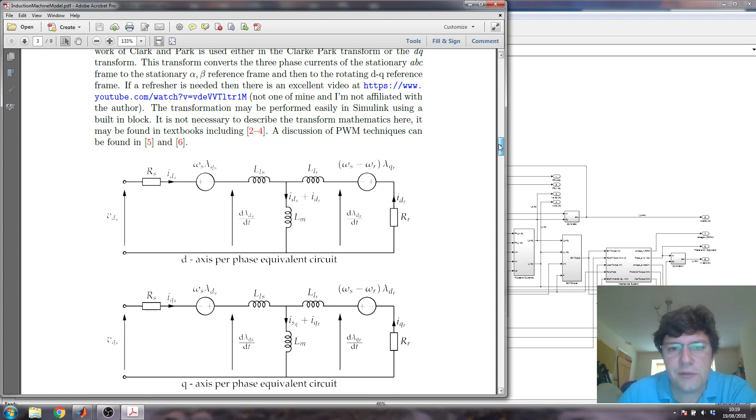Alrighty, so we have our Simulink induction machine model, and this video relates to the Simulink induction machine write-up, which I have on my website. I won't go through it, but effectively the video is there to get from the defining equations, which are derived at some length, into how you actually put it all together in Simulink.

So I've got the model here. There is a model in Simulink of an induction machine, and you can use that, no problem. It may be the case that you want to derive it so you know how it works, or it may be the case that your professor has told you that you will derive it, and that's that, because they want you to know certain things about it, or they want to be certain that you understand it.

It may be the case that you want to extend it somehow in a way that the built-in model isn't easily amenable to. Or it might just be to demonstrate a certain setup that you want to have of your own, rather than having to rely on certain Simulink packages or model toolboxes.

So we can start at the left hand side, and we've got some connections for the phases, and we have each phase, we could call them,

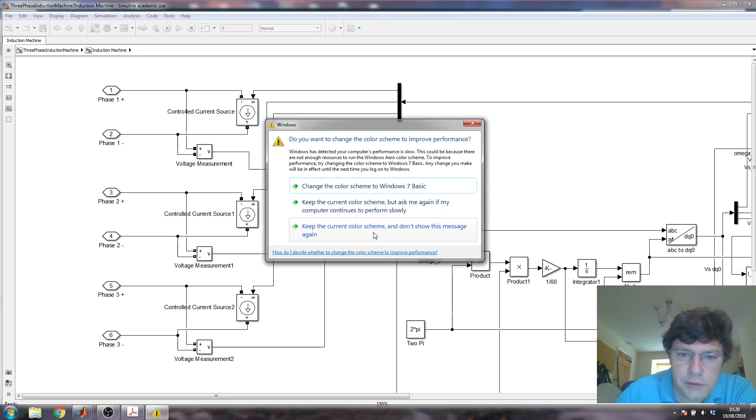Go away, wretched creature. It says don't show this message again, but I'm pretty sure there are other videos of me where it pops up and says don't show it again, and I click it and it duly puts it into the next video.

So there is no neutral point here, we've got open windings. It's the business of the person who is modelling the machine with the power electronics and whatever else is used to decide how that machine's wired up. They need to be able to wire it in star or delta, with or without a fourth wire, a neutral wire. So we will just call it plus or minus, but you could say dot and non-dot if you prefer, because secretly we know there's an inductance with a series resistance.

So if you're reading the text, you'll know that my preference is to model the entire system as a controlled current source, in order that we don't end up with a singular matrix in our simulation due to the connection of voltage sources. And this is certainly true if you're using a voltage source inverter.

If we ended up impressing a voltage across these terminals, and this was a voltage proportional to effectively the back EMF, and there were no resistances as well, we'd end up in a situation where two voltage sources have been connected together, and Simulink will either insert a little resistance for us, which is not really desirable because we need to be in control of what Simulink's getting up to, or it will throw us an error, which is more desirable than inserting a little resistor, but it's still not very desirable because it is traditional for simulations to run properly.

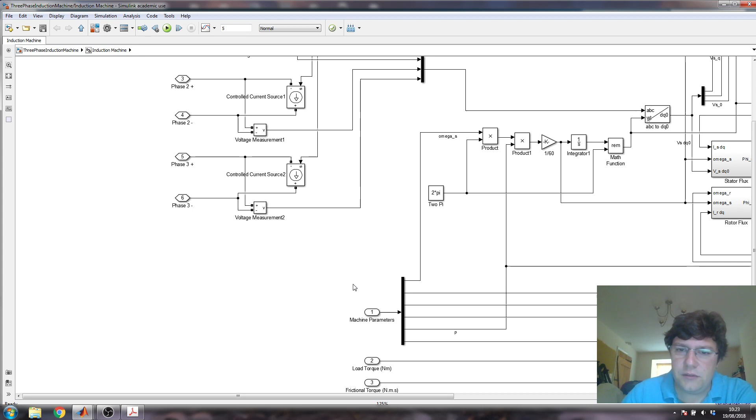So if we zoom out a little bit, we've got a set of machine parameters that we're going to put in, and these will be the machine parameters which are given in the documentation. So we've got the synchronous speed in radians per second, the mutual inductance, the rotor leakage inductance, the stator leakage inductance, number of pole pairs, and the mechanical inertia of the rotor and whatever the rotor is connected to. Other things we have are the load torque and the frictional torque.

So this is if you were connecting this machine to, say, a gearbox, and you know that connected to the other end of the gearbox there's some other things you need to drive, like a fan load, you might try to model the torque which is produced by the aerodynamic effects of the fan load. It might be proportional to the speed squared or the speed cubed, and you have some load torque value that is derived from that, and you know the speed because you have the rotor speed.

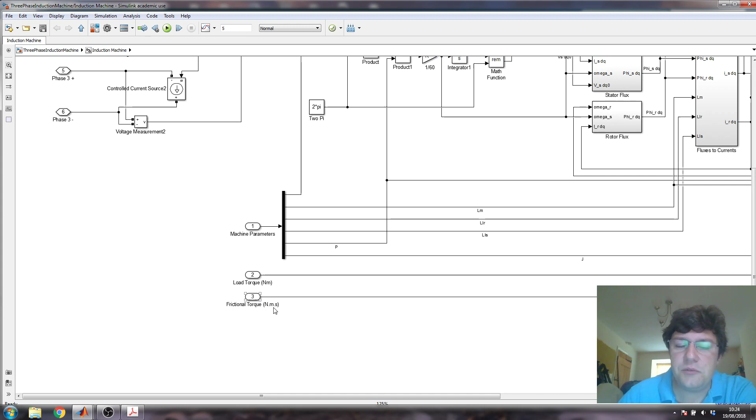What is more, there will be some bearings in this gearbox, for example, and they will have some frictional drag, and of course there will be friction for the fan and everything else, so maybe we have some frictional torque as well. And in the write-up, that's called D. I don't know if it's called D in the diagram.

I haven't labelled it. Very naughty. I could label it D if I wanted to. The way you do the labelling is you just double click the wire. That would be how you did it. I could call that TL as well. I did it somewhere else. Good. That's alright then.

So there's a fair bit of, sorry, I should zoom out up here, down there. That's it. It's so far away. So these are our voltages which are impressed on the machine windings, and we've got our ABC to DQ. So this deals with the Clarke-Park for us. It's a built-in Simulink block. I can't really look inside it because Simulink doesn't allow that sort of thing. But I've set up this, the standard. You can choose another as well. It really doesn't matter too much which you choose. I will leave it as this one. All it means is there'll be phase shifts in your answers.

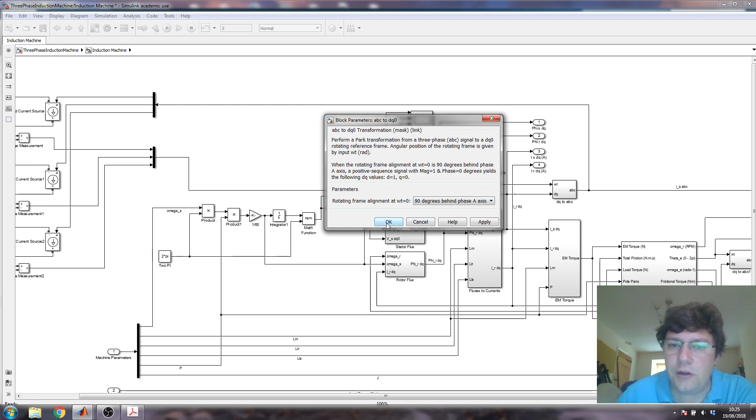So we've got our DQ, and we are going to apply this to the calculation of the fluxes. So we calculate the fluxes first, then we do our calculation of the currents from the fluxes, then we do our calculation of the torque, electromechanical torque, then we do our calculations of the mechanical system. This gives us the torque on the shaft, the speed of the shaft, and so on, and these parameters are fed back variously from there, and there.

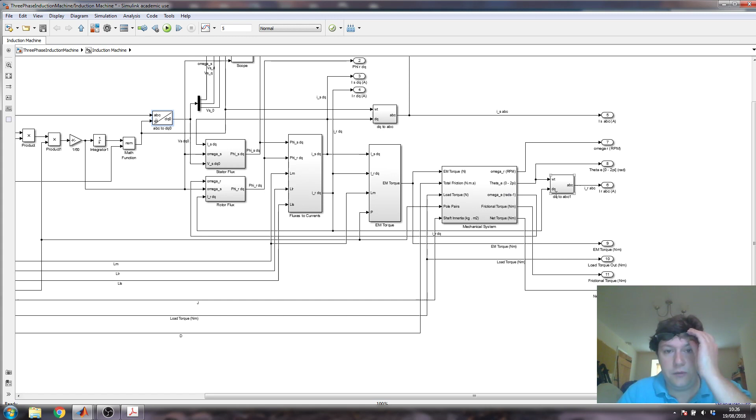Having DQ to ABC then goes back to give us our currents that we are drawing out of the supply. In fact, it's this block here, so these are the stator referred DQ currents, DQ to ABC with the omega of the rotor, and then they are injected back into the, is it the rotor? Pardon me, it might not be. Let's have a quick look. Omega S, the stator is this, which makes a lot more sense. So we have the stator currents in ABC reference frame, and they are what's fed back to effectively the windings that we are connecting up as the stator. So we do a little bit of calculation here, which I'll come back to in a bit.

So if I was to go into the stator flux block, I've got the synchronous speed, the stator voltage in DQ, and the stator current in DQ, which is fed back from this calculation. So not only are the fluxes calculated with respect to each other, for example if I look at this wire here, sorry, not that wire, one of these wires, there are elements inside this block. Oh, here we go. So the stator flux is calculated based on the stator DQ current because of this feedback here, and the rotor flux is calculated partly based on the rotor current. But to calculate the rotor current we must first solve for the flux, because of this wire here in the case of the rotor, and this wire here in the case of the stator. So Simulink has to solve all of these equations simultaneously.

So if we go into the stator flux, try to get it where the camera cannot block any of it. There we go. When I say the camera, I mean the picture of me, which is down here. So we have our synchronous speed in rads per second. Probably should have put some units on there, but never mind. The stator voltage in DQ and the stator current in DQ. Now I've cheated a bit here and I've put some constant blocks in. Ideally, if you've got a much larger simulation where this motor or generator is a part of something else, it would be preferable, instead of hard coding this stuff, to load it up from the workspace when you start the simulation.

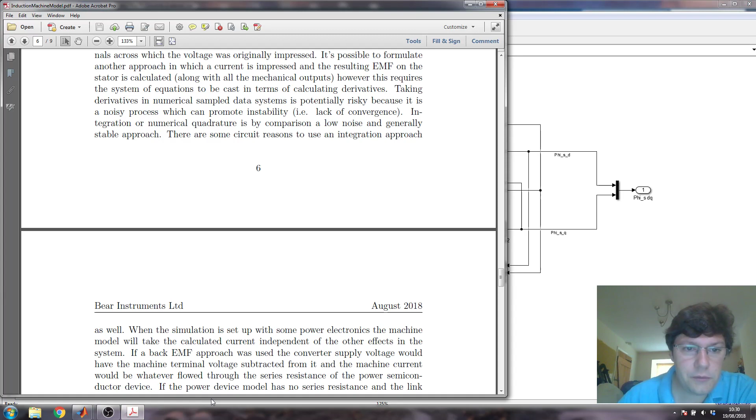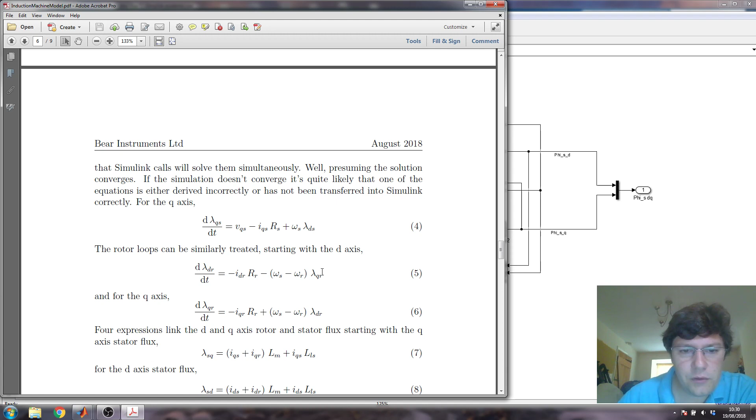What I'm doing here is I'm developing the d flux by dt for the stator. So if we went back to the document and I scroll up to the appropriate spot, this is the d flux by dt follows this expression here. Is that the one I'm after? Yes, it is. Effectively, it's these set here, for the rotor and the stator. These are just the stator, of course. The rotor's in a separate sub-diagram. So this is the stator d-axis, this is the stator q-axis, and this is the expression I'm developing.

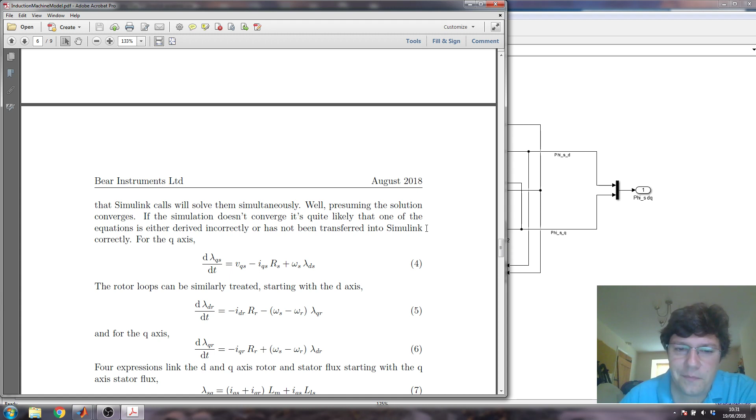VSQ minus ISQRS plus, I call it phi. I know it's lambda in this document, but I wrote it in my lab book as phi, and I'll have to change it to phi later. So when you download this, it'll probably have phi there, but there we go. Phi SD omega S, and you'll integrate that, and of course you have to take something back from here and feed it back, which is the Phi SD omega S, because it's multiplying it.

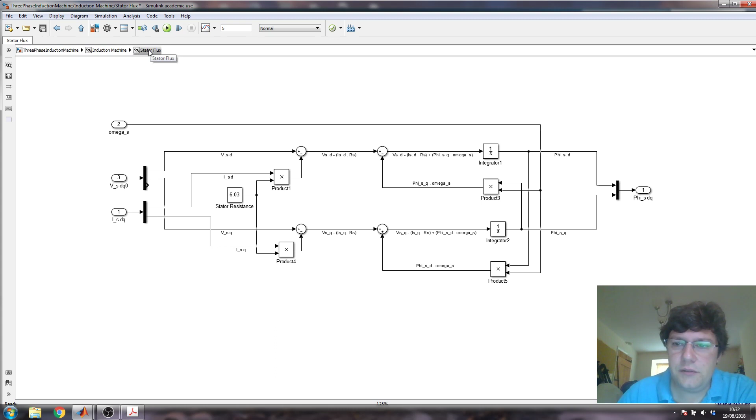Oh, it's added to, so subtracted from the VSD ISDRS, and that yields this bit. Then we integrate, and that gives us the Phi SD. So this lot is the text form of one of these. It's a very good idea to label up your wires like this. So that's how we derive the flux, or not derive, produce the Phi SDQ.

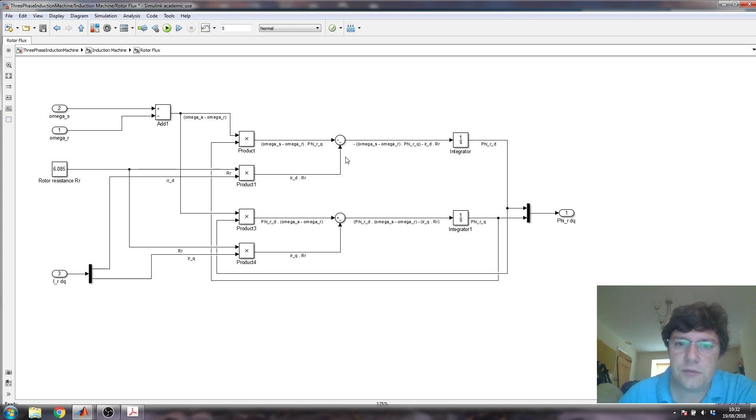Going back in, I've got the rotor flux as well, exactly the same setup. I've hardwired the rotor resistance when I could, of course, have taken it off the workspace. And I have the same arrangement, slightly different equations, same method. We develop the differential equation, then we integrate. Nothing unusual there.

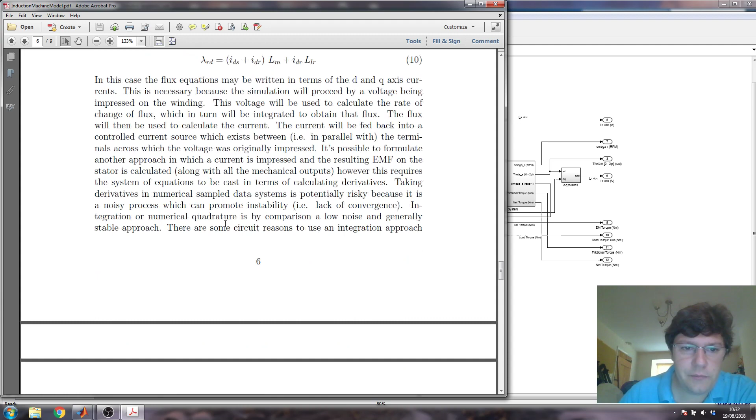Then we want to get from flux to current, so we have the four flux equations. They're derived from these four, 7 through 10, but I write two of them out further down in the form that I actually implement them. I didn't bother to write out the other two because it's not difficult to see from 11 and 12 that you'll end up with an IQR and an IDR that have some fluxes and some currents and inductances on the top, and they'll have some LM plus LLR on the bottom, or denominator.

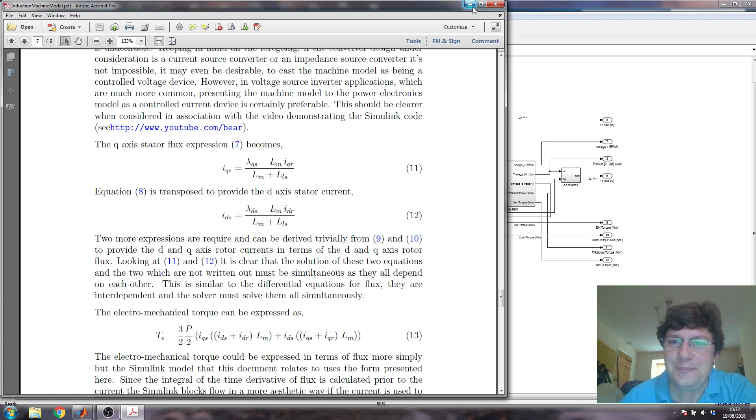So we will have a look at the current block. So inside here I've got 4 blocks, each for one of the currents. I take in the two sets of fluxes, and I've got some parameters that I took from way back. So if I go back here, I've got some

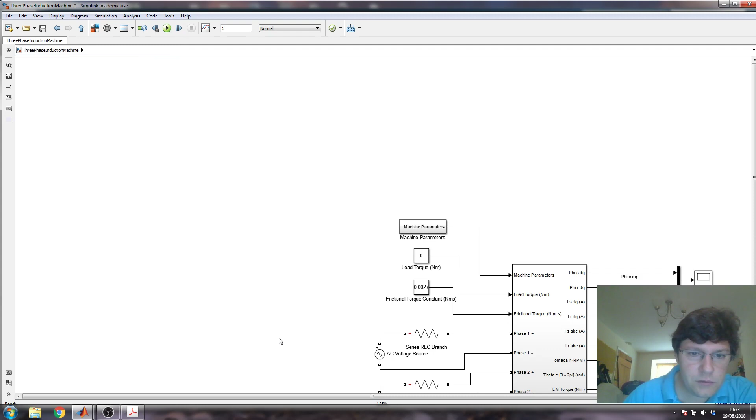One of the things I've never liked about Simulink is the way it likes to zoom in on things.

This is where I started the video. I've got some machine parameters here, and I'm feeding those up into the fluxes to currents subdiagram and they appear here. You could draw these from the workspace as well, in which case you don't need to pass them around in wires, and that would be a very sensible thing to do.

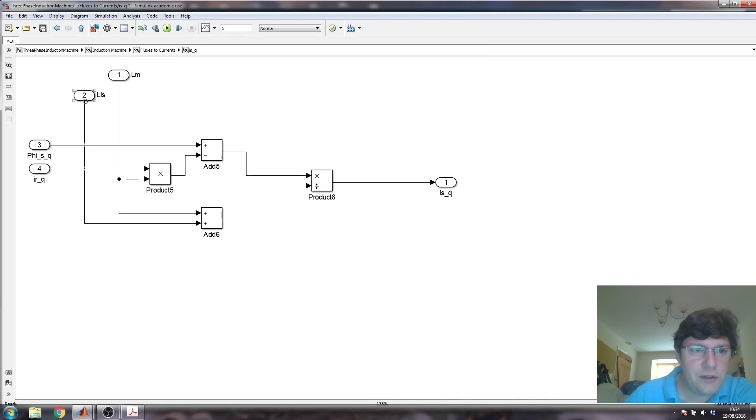So if I just look at one, we'll do one that's actually in the sheet, the stator Q axis. There really isn't very much to it. I didn't even bother to label it, which is perhaps a little naughty. But all this does is implement, which was it, Q or D? Q. It implements that expression there, flux minus Lm IRQ all over Lm plus LLS. This is Lm plus LLS added, and then dividing this bit here.

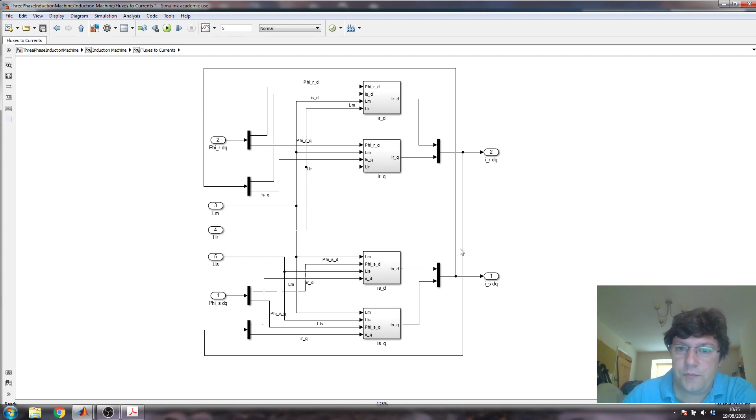Reasonably trivial stuff. So there's 4 lots of that, and they produce the IRDQ and the ISDQ. And you will note that there is feedback from IRDQ to calculate ISD and ISQ, and there is feedback from ISDQ to do the calculation of IRD and IRQ. So once again, Simulink has to solve this lot simultaneously.

So once we've got some currents, we can do some torque calculations. So this equation is a little bit longer here, so I've decided that it's in my best interest to write them out properly. If you don't write out the equations, what you'll probably find is it doesn't work, and then you have to sit down and figure out why. It's the same with how neatly you draw out the diagrams. If you don't draw them out neatly, it just makes it a rat's nest, and then you have a hell of a time figuring out what's going on.

So we've got our ISD, our IRD, our ISQ and IRQ, and they're just unmultiplexed. And we are effectively working our way towards 3/2 times the number of pole pairs times some currents times some inductances. Actually, these are just fluxes, but if you go back here, I didn't like the idea that I have to put fluxes straight in here from here and go round the side. Since I have the current here and the general flow of the diagram is left to right, I would prefer to take the currents in and do a little bit more calculating.

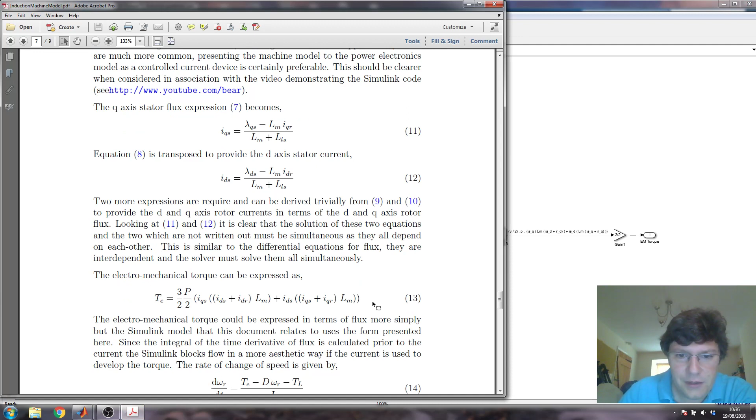You can of course see things differently and put this block down here maybe and couple that straight to this. That would be alright as well. Anything that works is fine as long as you can explain it. So I wouldn't bother to, I mean, this equation is this equation here, it's 13. It's just written out uglier. We're just adding up and multiplying and doing the things we need to do.

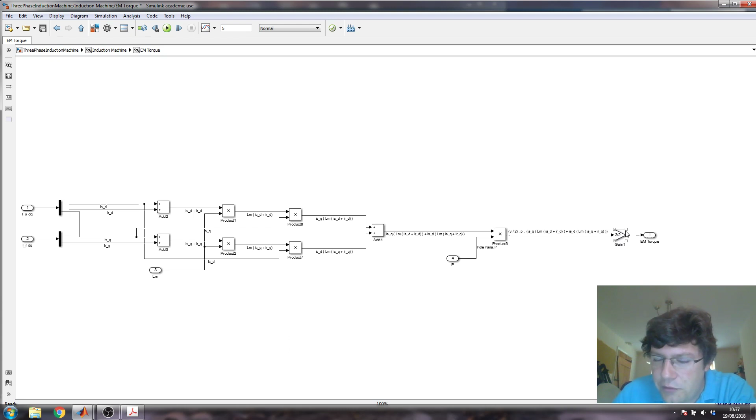There's a slight mistake here. If you look, there's no 3/2 in this wire. The 3/2 is actually on this wire because here's my 3/2 gain block. But never mind, it's just a minor thing. And we get out the torque. Then we will do some calculations of the mechanical system.

So we take the electromagnetic torque in, we take in the frictional torque which is supplied, is the D, we take in the load torque which is supplied, is the T sub L, number of pole pairs, and the inertia which is J, and out of it we're producing, well, the frictional torque is only the frictional torque we took in, but I like to have it as an output because sometimes I want to look at how much friction I've got on in the mechanical system. Essentially it's a way of working out how much useful work I'm getting out of the machine or out of the system the machine is connected to.

We also have the rotor speed. I like that in RPM because I like to think in RPM. I don't like to think in radians too much. If I'm dealing with machines, then we think about mechanical degrees and electrical degrees, and I might have to think about radians a bit, but I would prefer to compute everything into RPM. Then I've got my electrical position effectively, which is 0 to 2 pi, and that will loop back. So you'll get a sawtooth waveform as the machine rotates continuously. I get my electrical speed, which is in rads because that's the common method, and I'll end up with the net torque. And if of course the net torque is positive, the speed of the system will be going up.

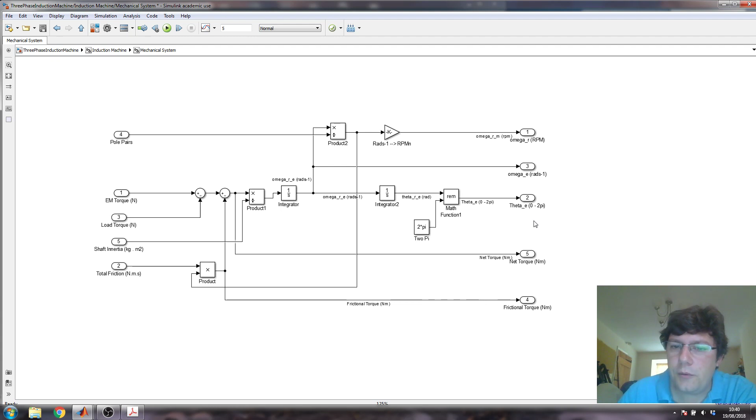With the theta electrical, we must take it out and use it to do some calculations of the rotor currents in the DQ frame back to the ABC frame. We don't actually need to look at these. There's nothing that says, oh, we must inspect them. We don't take them back anywhere into the model, but it's nice to have them.

We can see the currents in the rotor bars or rotor windings if it's a wound machine, as the simulation proceeds, and we don't usually have access to that information when we're actually testing the machine on a dyno, unless we've bothered to insert some shunt resistor into the machine, and we can have some slip ring on the back, where we can take off parameters for the rotor and measure them using an oscilloscope or whatever. I don't know of anybody that does that.

They do their calculations, they do their FE, they run their simulations. If they get the torque and the power they expect and the efficiency that they're expecting, they take it as read that their calculations of the rotor currents will be right. You'd have to be very, very paranoid to make the extra effort of doing a special machine that allowed you to take off the rotor parameters.

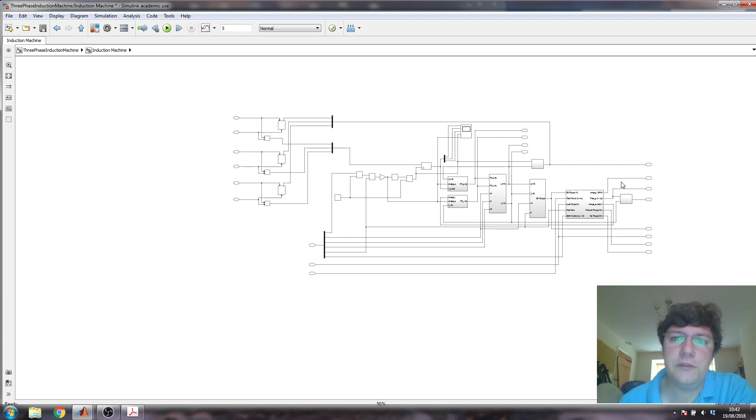Sometimes for temperature it's done, but it's much easier in machines where there are slip rings anyway, like a wound rotor machine. A wound rotor synchronous machine. You have to put current into the rotor anyway, so you're going to have a slip ring. So there's no reason why you couldn't put a thermal sensor in there and have a couple of extra slip rings that just take the sense currents out.

But in the case of the induction machine, we desperately want to avoid the slip ring. So even if we decided to do some special machine, we'd probably try to avoid that. It adds expense, effectively.

So then we say, well, what about this stuff here? This business here is to try to tell the simulation what the omega t is for the DQ transformation. We need to effectively make a fake resolver so that we can do our transformations properly. If you're doing this sort of field orientated control, you will almost always have a resolver. There's no real chance not to.

I'd be very surprised if you did, because we need to be able to supply the calculations with where the d-axis is, because it's always going round inside the machine. We need to know where. So we have our synchronous speed, and we will multiply by 2 pi, and this will give us the electrical synchronous speed, and multiply by the pole pairs, so we know how regularly these 2 pi radians are occurring as we actually traverse through 2 pi mechanical.

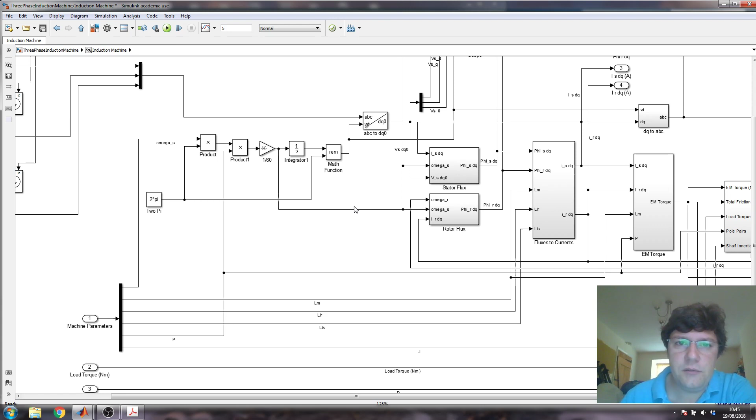If you did some work on the bench or in the dyno and then you went back to your simulation, you wouldn't be able to marry up after so many seconds of simulation and so many seconds of actual running. These things will be the same? They won't. It's just to allow us to proceed the simulation. And if you were doing this for real, this will be done inside your DSP or dSPACE or whatever it is you're using to run your machine.

So that's the overall mechanism. We have some voltages applied to the windings. We have some currents which flow in the windings, or in the quote unquote windings, which are caused by the operation of the machine, which is dealt with by the equations. We have something to work out what the position of the rotor is in DQ frame.

We do our transformation, we do our calculations of the fluxes, we use those to do the calculations of the currents, we use the currents to do the calculations of the EM torque, and also the currents are fed back to do the fluxes. Having calculated the torque, we deal with our mechanical system, and you can make a mechanical system as complicated as you like.

Then we go from DQ back to get the rotor currents in ABC frame, just because we can look at them. We also have to go from DQ to ABC to give us the stator currents, which we need to inject back to draw from the voltage sources that are driving the machine. If we were using a current source to drive the machine, we would probably be sending back a voltage, and we would cast these equations, well, not the mechanical system, that would be the same. We would cast these equations slightly differently, but it's not beyond the wit of people to derive them if they need to.

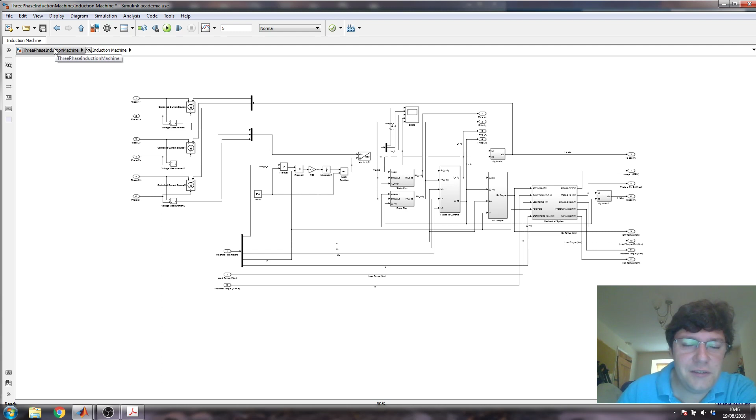So if we go up one level to a place before the simulation, I've got a giant block, which is the machine, and I've got some AC voltages, and I've got some series resistances, probably not very big. This is not the machine resistance, this is the resistance of the supply. Even if you have a very large capacitor bank full of very low ESR capacitors and very short wires, there will still be some resistance. You may as well put it in. You're probably going to end up modelling it at some point.

Machine parameters I have in a block like this. As I say, you can derive them from the workspace. It's probably better to do that. No load torque at the moment, so it should spin up pretty quickly. And frictional torque, I don't know why that isn't inside there. I could put it in quite easily.

I'll be looking at the DQ axis stator flux, the DQ axis rotor flux, DQ axis stator currents, rotor currents, ABC frame stator currents, ABC frame rotor currents, rotor speed in RPM, the electrical position of the rotor in rad, 0 to 2 pi, then it goes back to 0, electromechanical torque, the load torque, which is this one. I'm just passing it through so I can look at it on the same graph without having to wire around the block. Same goes for the frictional torque. The net torque will be the difference of those. And if I go in, that's what that is. So we can run it, I should have thought.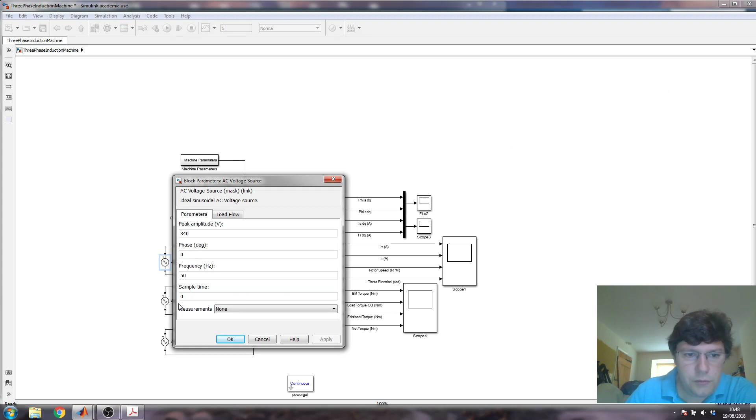These are set up 340 peak. This is a 415 phase to phase machine, and I guess I've hooked it in star, although I haven't explicitly connected this point and that point and that point. As far as the simulation is concerned, when we look at the waveforms, you'll see that it's in star. 50 Hertz because we're in the UK, and no phase shift. Second phase, 120 lagging. Third phase, 120 leading. You could do leading and then more leading, or you can start lagging and have less lagging and then 0. It's entirely up to you. It's all relative.

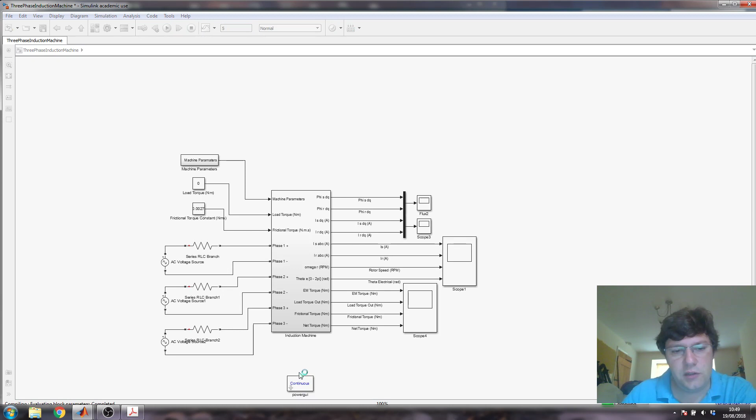So I can run for say 5 seconds. Hopefully it will simulate quite quickly. We've got the power GUI block down and it's continuous, and there's nothing special about the solver at all. Totally standard settings. We'll have a look at the settings in a minute. And it should start up.

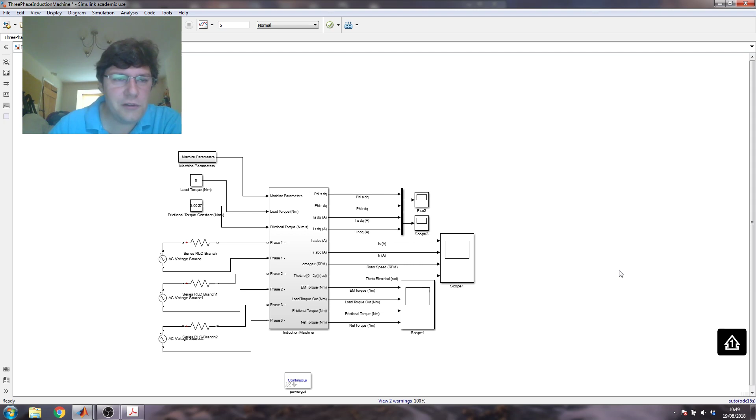The video is in the way, isn't it? And you can't see the time progressing. Let me see if I can move the video. Popping up there for a bit. That was weird. I'm on, I don't know, 3rd or 4th generation i7 laptop at the moment, so it's not a special machine, it's not HPC or anything. So we can have a look at some data. I'm just going to move the video back. Don't like heights, don't want to be in the top corner, it's a bit weird. There we go.

Right, so we can have a look at maybe some mechanical properties. Yeah, all that about it being quite a good computer. Yes. Come on, make this a little bit smaller. There we go. I can't remember exactly where the video comes to, but I guess it's probably about there. How does that look? Yeah, believable. I could probably go even a bit further. That'll do.

So we have initially, this is the rotor spinning up. Don't forget, there's no saturation in this model, so we can get torque that probably you can't actually get in a machine, because the currents we'll be generating here in the windings will be so large that the machine iron will saturate and you won't get the linear operation that this model suggests. And you can add the saturation if you want to, by adding some equations. But we've got a period of substantial torque, and then the torque dies away, because the speed has probably got to the point where the machine is running at constant speed, and there is a very small torque here.

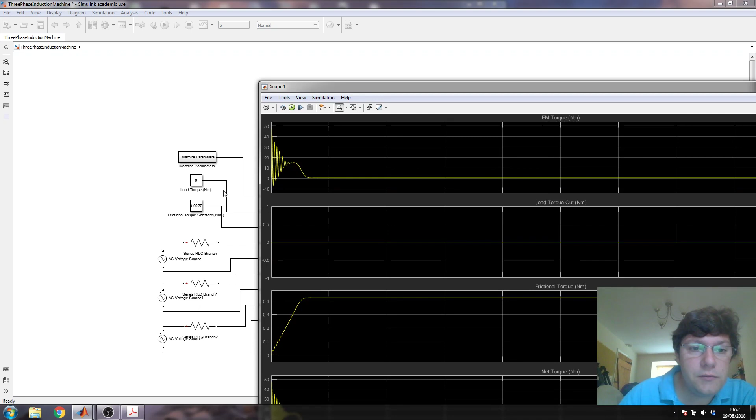The load torque is 0 because I set it up as 0 just here. If I hadn't, then the load torque would end up being added to the electromagnetic torque, as well as the electromagnetic torque required to overcome the friction. And of course the net torque I expect will be dead on 0. It is. The net torque is 0 because there's no extra torque. If there was net torque, speed would be changing. So that's some mechanical stuff.

You can look at some other mechanical stuff as well if you want to. Here's my other mechanical stuff. Let's see if I can make this the right size. So we have some stator currents, some rotor currents, some rotor speed, and some electrical angular position of the rotor. This looks right, by the way.

The bunching up of the waveform, or the increasing of the frequency, is the machine speeding up, and here we have the speed, and you can see there's a bit of torque ripple at the start. There must be torque ripple to generate this change in speed. If we went back to the torque, you can see the torque ripple there as well. And we have some rather large currents. Now, the rated current for this machine is just under 3 amps per phase. Of course, we're not loading it very much at the moment, so we don't see that. We only see somewhat less.

The rated torque, I can't remember. It's probably in the write-up, maybe. If not, it will be in the machine nameplate or in the documentation of the machine manufacturer. This is a real machine, by the way. Well, obviously the simulation is only as real as the equations represent reality, but I mean the parameters I'm using are not made up. They are for a real machine, for a problem that I've got at the moment, for myself. It's not a commercial problem. If it was, we wouldn't be able to discuss it.

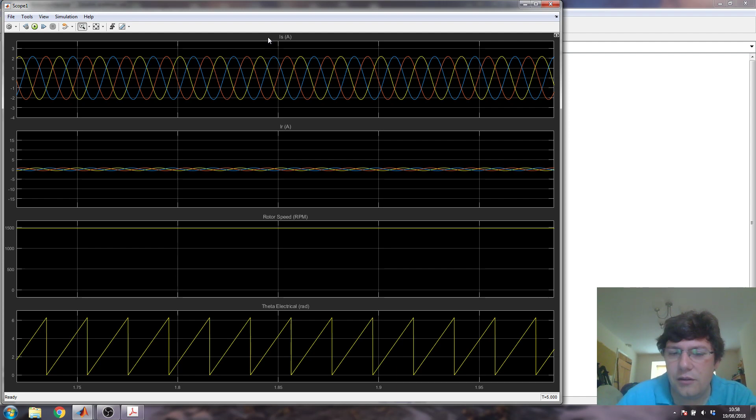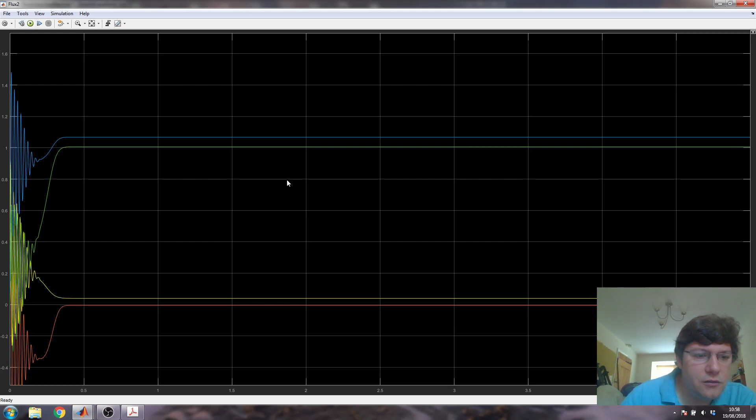Now, as I recall earlier, the ABC reference frame stator currents are about 2 amps, and they're now somewhat more than 2 amps, although there's not a lot in it, but 2 Newton meters isn't a very large load torque, so that doesn't concern me unduly. Fluxes, I think we had about a Tesla before, and we've got about a Tesla again, so I'd need to put a bit more of a load on to see that much difference.

Net torque, still at 0, but the frictional torque 0.43 and the EM torque now. Before it was about 0.43 or thereabouts, so now it should be about 2.43. Yeah, near enough, because we've got an extra load torque of 2 Newton meters. All that does is push this up the y-axis. Fine, so I'll take that off again.

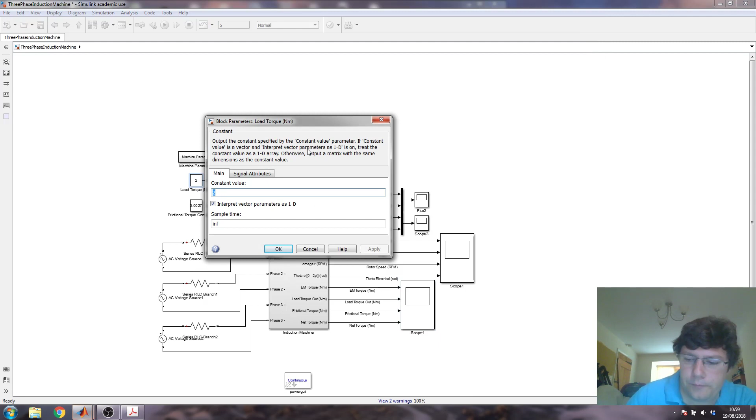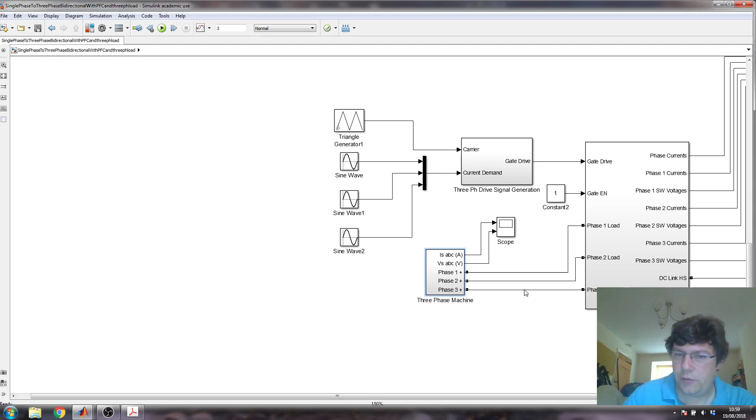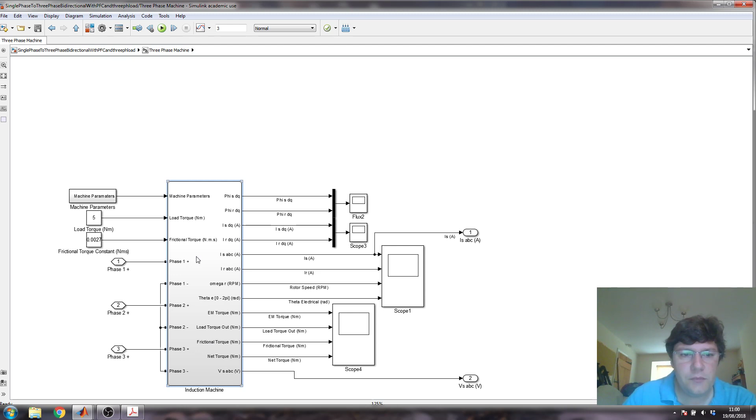If we, I shan't save it, wanted to see it in a machine. This is quite a substantial simulation that includes the induction machine. So this is my induction machine, and I'm only feeding back a couple of things to my main simulation sort of front page, but inside it is the block we're familiar with. I think there are one or two subtle differences, like I'm pulling out a few extra things, and if I go inside it's the same model.

The only difference is there's a little shunt resistor here to give the convergence a bit of a hand, but I should have thought it's a mega ohm. It is a mega ohm. So this is something I will talk about in another video.

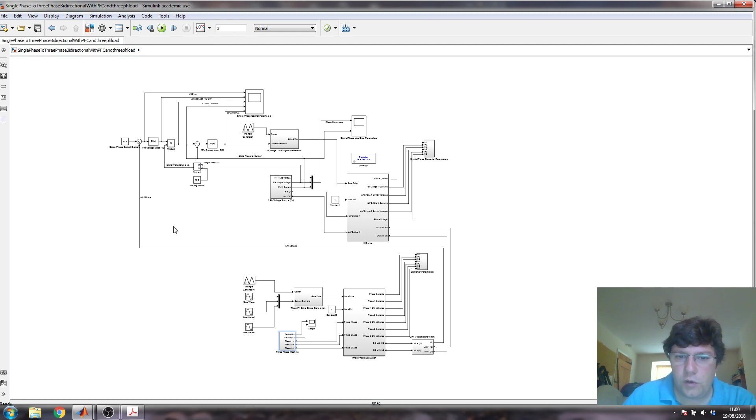It's a single phase to three phase bidirectional converter with active power factor correction on the single phase side. So it's an active H bridge and a three-phase inverter. I don't propose to talk about it all now, but I'll just show you some waveforms if I have them loaded up. This takes a little bit longer to simulate, but this is my 6-switch converter, and if I was to look in it, I have 3 power poles, and if I looked in those, I've got some switches and stuff and things, and I've got some PWM and some sine waves and so forth.

And if I was to fire up the scope, is there any data? No data. What a pity. Got to run it now. So this takes a little while to run.

I'm going to have to think of something interesting to say. No, can't think of anything interesting to say.

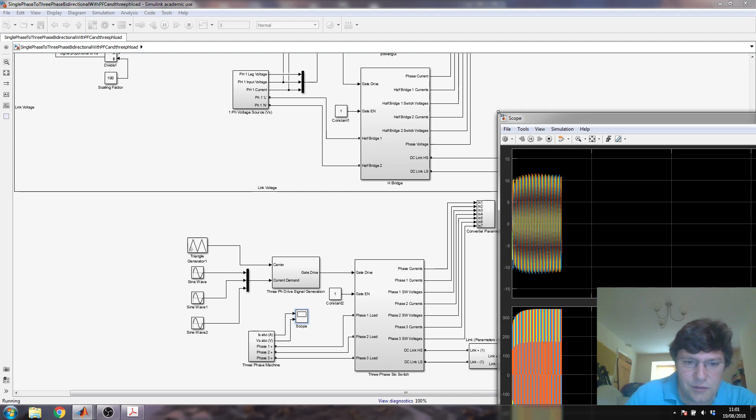It's going along. We have got about 100 milliseconds so far. So if I have a look at, so these aren't labelled because this simulation isn't really ready for the road yet, but it's stator currents on top in the ABC frame and stator voltages on the bottom in the ABC frame. So this is stator currents, this is stator voltages. And I don't really need to see too much more because I think we are up to speed more or less. We had a look at this little chunk here, a few waveforms.

Maybe I can set it to size. We've got some reasonably nice looking sine waves. You can see the chopping, the PWM, and you can see the voltages look horrible. But if you were to take the averaging, you would see they are sine waves and they have the right phasing.

This is quite common. All that's really happening here is this is the link voltage more or less, and this is the minus link voltage, and the current is smoothed by the inductance, both of the machine, and in this particular case there are filtering inductors on the output of the switching power poles, but we don't see that in the voltage. The voltage at the machine terminals can fly up to the rail and down to the minus rail as soon as the switch turns on.

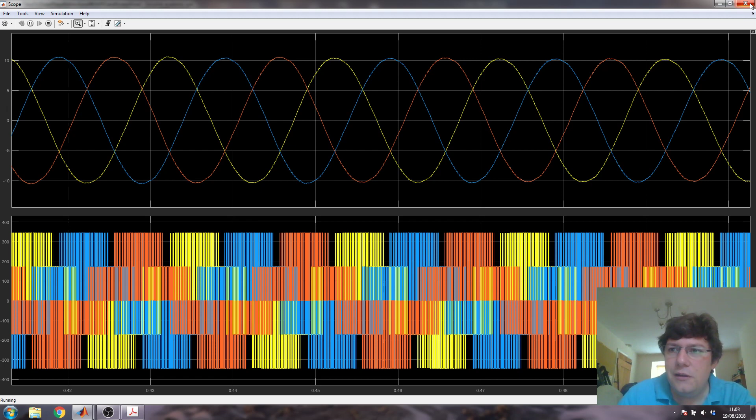So it's quite common to see this sort of thing when you're actually simulating the machine and the power electronics together. But if I saw that in the lab, I'd be pretty happy, really. That's quite a nice looking sine wave. What else can I have a look at? We can look at some other things like converter and that sort of thing.

If I wanted to see the torque in this particular situation, I can still zoom into this and I can still have a look at the torque. And this is our running up to speed. This is we've hit the speed that we intend to run at. Frictional torque has leveled off. We've got some torque in the system now, so I've decided to load this up, probably because I'm testing something where I want to see it loaded.

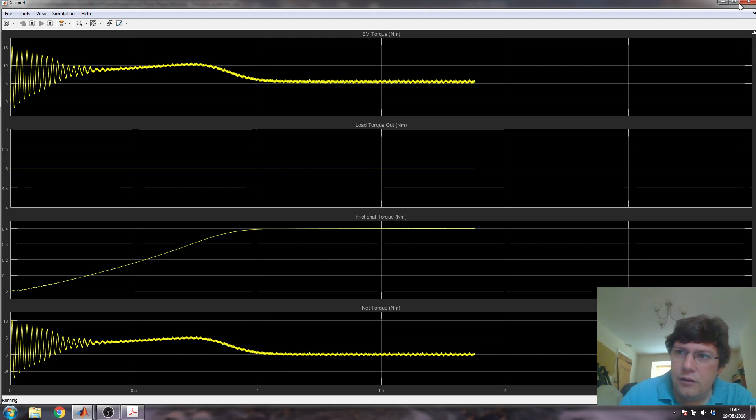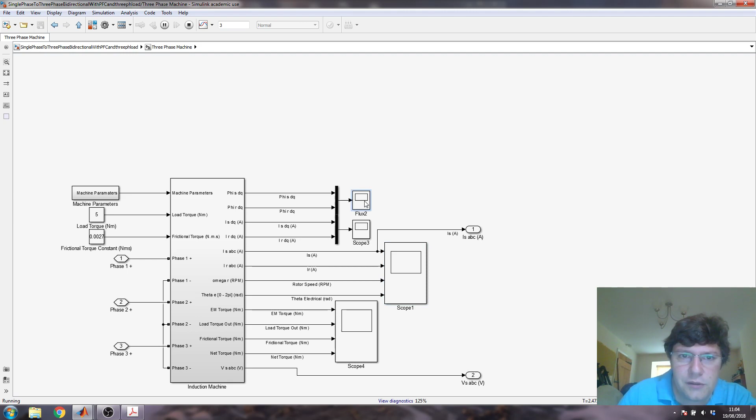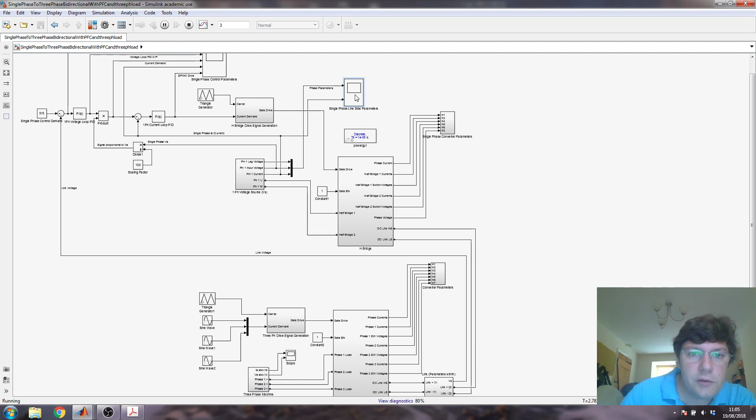This has nearly finished. I'll let it run. If we wanted to look at the fluxes, we could. We can see. I still haven't labelled them. Very naughty. And we could look elsewhere in the system as well. I will do this in another video more fully, but if we looked at the single phase line side parameters, we should see what we like to see. We'd like to see the current and voltage in alignment with each other.

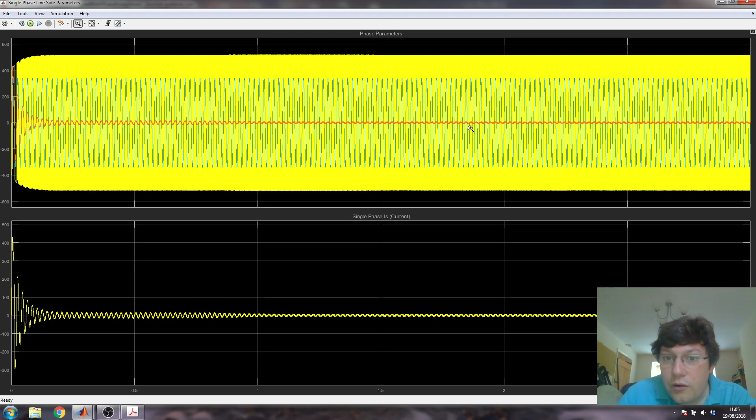That just means the simulation's finished. Right, you'll have to stare really hard, but... Oh no, I've got it here in orange. That's okay. So the orange is the current, and the blue is the voltage. Pity I didn't multiply the current by some convenient factor. But anyway, this is a minimum in current, and that's a minimum in voltage, and that's a maximum in current, and that's a maximum in voltage. The voltage and current are in alignment with each other, which is good because that means power factor is unity.

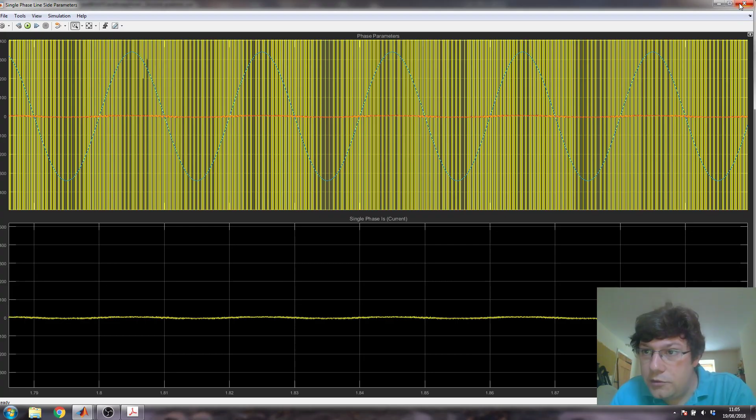Of course, if we went back and looked at the voltage and currents for the machine, on the machine terminals, we'll find the power factor is not unity. The machine is dominantly inductive, and we should find that the power factor changes accordingly. So we haven't really got away from anything with this setup. As far as the line side is concerned, yes, we have unity power factor. As far as the machine is concerned, it's got the same power factor. It's always had power factor that was given by its design. It doesn't mean we can underrate this three-phase inverter.

It still has to supply the current the machine needs while it's got the voltage across it that is left by what the machine doesn't have across its terminals compared with the link. So under the ideal situations, you have the smallest voltage across your switch and the biggest current through your switch, and then your switch power is minimum. When the power factor is unity, that's the case.

As the power factor drifts from unity, you end up with appreciable currents in your switch and appreciable voltages across your switch, and that leads to appreciable power dissipation in the switch, which is why your inverter has to be overrated when you're trying to drive a machine that doesn't have unity power factor, which is what this is all about. But we won't go through how the active PFC works now, and I won't discuss the H-bridge.